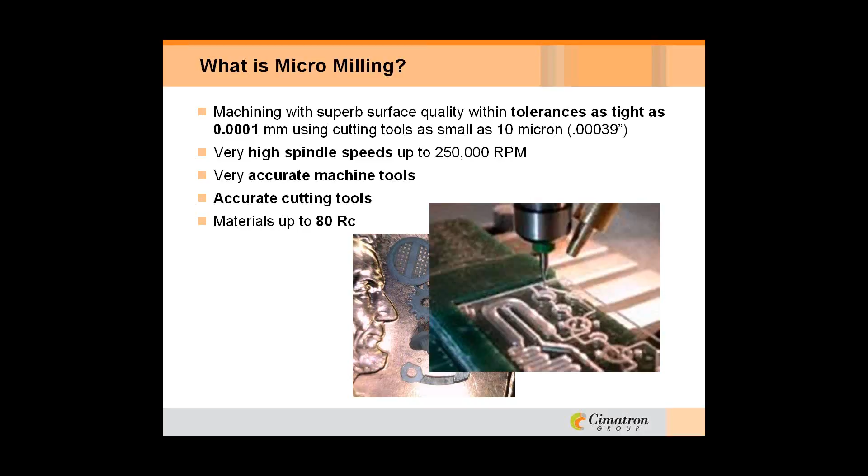Along with the micromilling, you have to have very accurate machine tools with repeatability and location and all that stuff. Again, the cutting tools have to be very accurate, and they're cutting materials as hard as 80 Rockwell. Quite a bit is going on in this industry.

These machines go from 2-axis through 5-axis. Again, spindle speeds 25,000 or 250,000 RPM and up. Positional accuracy is very, very tight, with acceleration of 2G force. Maximum feed rates—as we get into this further, you'll see why all of this is a requirement for these machines. Also the tool monitoring system, picking up the tool, monitoring the wear, the load, the growth on the spindle.

And then the machines also the controls—they have to be able to process a tremendous amount of data very quickly. They have to be able to look ahead and see what's coming when you're getting into corners and turns.

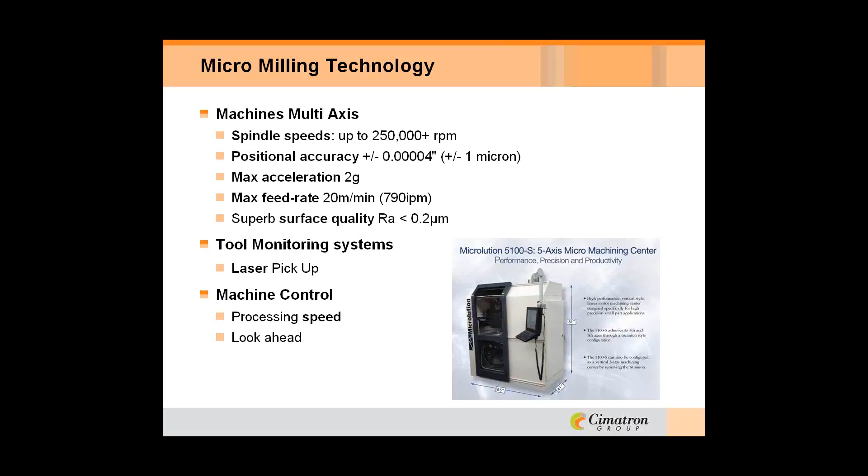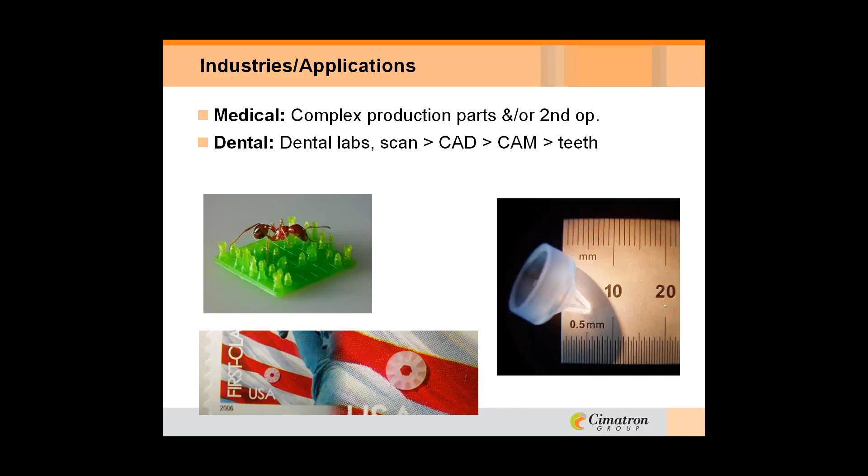Some of the industries using this application: medical, dental. If you notice there on the left, that ant—it's kind of hard to visualize, but that's actually a chessboard with all the pieces on it. So these are how small things are getting out there.

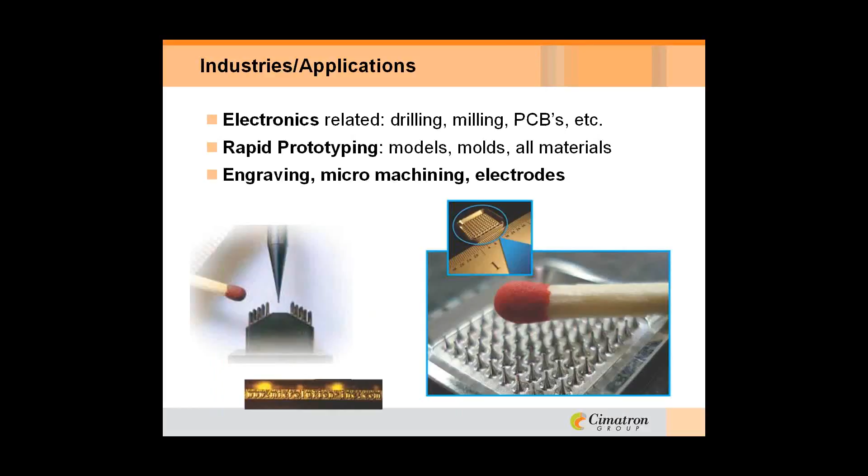Electronics, rapid prototype, engraving. We're even seeing machining of electrodes out of pure copper. Jewelry, and also in education, we see a lot of research and development being done on this new technology, the new machines, and cutting tough materials with the type of cutters out there.

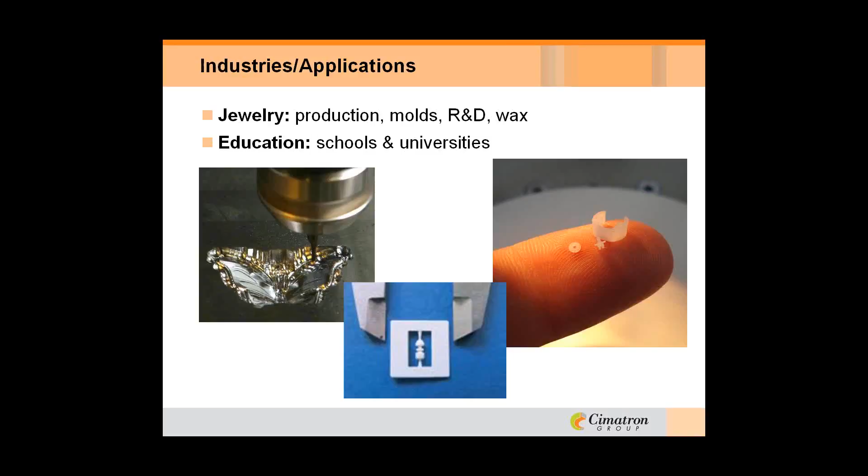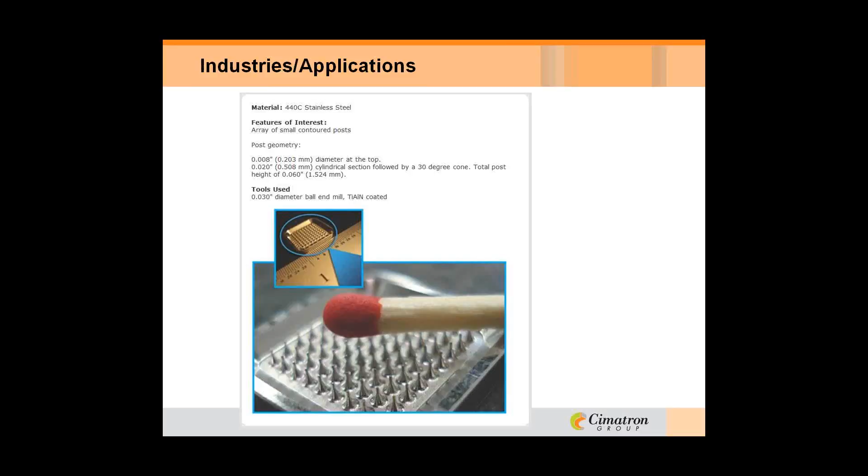Some of the applications—this one here was stainless steel. These posts were 8 thousandths in diameter, 60 thousandths high, and a 30 thousandths end mill was used. Again, real small stuff. This one here was brass.

Those cone shapes in the middle there have a wall thickness of 3 thousandths, and around the whole edge on the outside there are 8 thousandths diameter holes. So you can imagine how tough it would be to cut these with these tools, and how accurate you have to be.

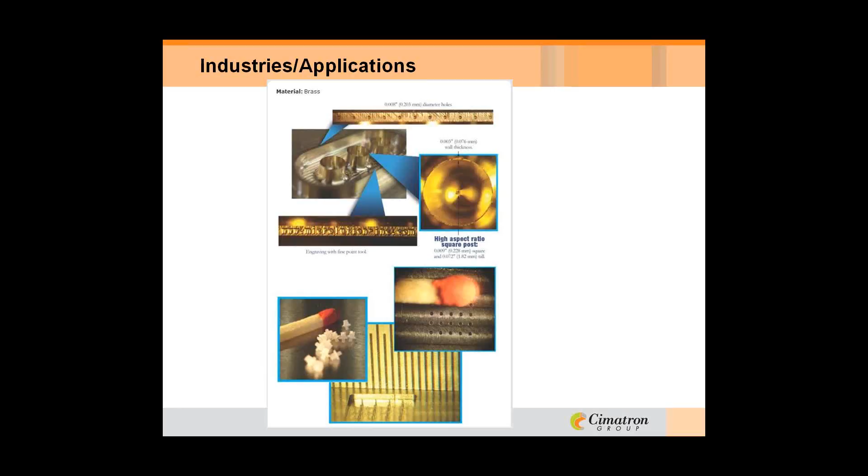Now, if we look at the micromilling challenges, the world is getting smaller. There's a tremendous increase in demand for manufacturing micro-scale components. And every day there's new challenges with new materials—they're coming up with new and different molds, coating.

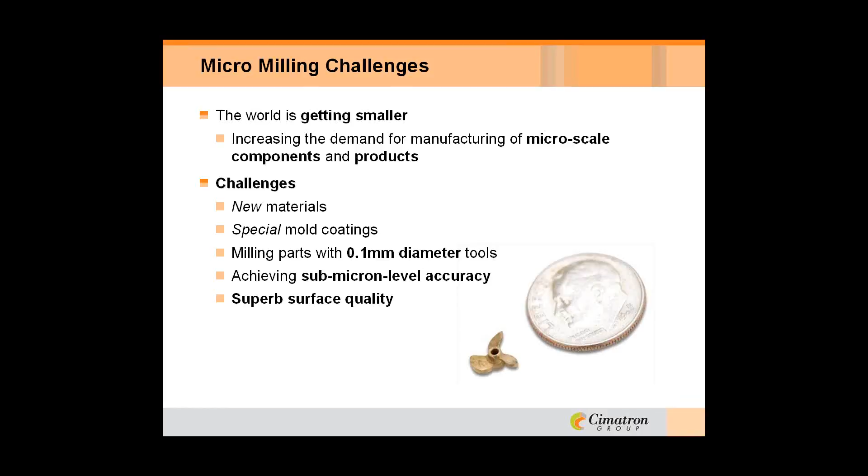Again, they're milling parts with 0.1 millimeter diameter tools. They have to achieve sub-micron level accuracy, and when these parts are that small, they have to come off completely done, so the surface quality has to be way up there. They're measuring these things with microscopes, and it's quite amazing.

Some of the opportunities you can see here: there's a small part that was a two-shot mold, and another one which was an insert mold for the electronics industry. A lot of people are looking into this as a niche market so they can have some competitive edge, because not everybody's able to produce tooling or produce parts this small.

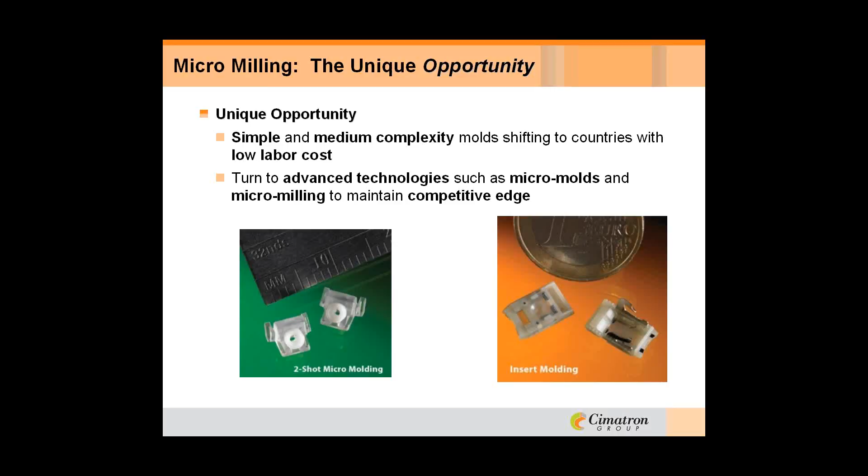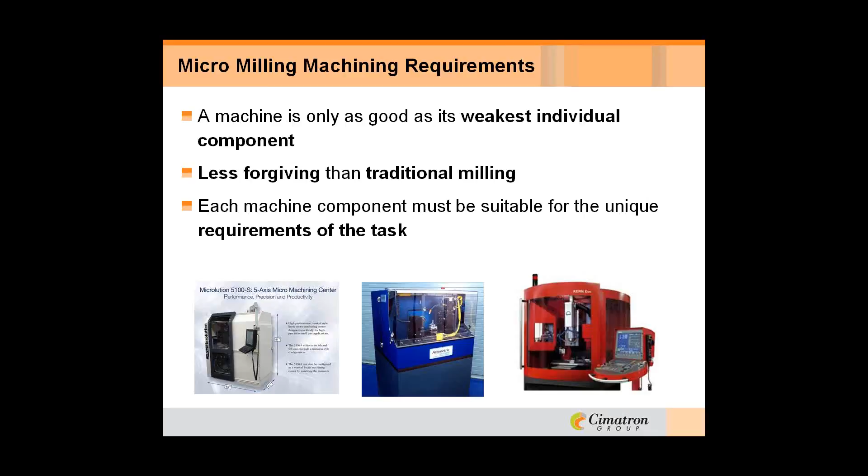Now, if we look at the micromilling machine requirements, the machine is only as good as its weakest individual component. It's definitely less forgiving than traditional milling, and each machine component must be suitable for the requirement of the task. If you're cutting real hard material, you're going to have to look at different tooling rather than using standard tooling for softer material. So there's a lot to consider.

If we look at some of the things you should consider if you're investigating micromilling: the bed and the architecture of the machine. Again, when you're holding microns and cutting with 2, 3 thousandths, 1 thousandth, 4/10 cutters, every bit of vibration is going to affect what's happening.

Also the temperature of the room and the parts, and definitely the spindle - what type of spindle, and what happens when you change tools, how accurate is it changing the tools. So there's all kinds of equipment to monitor all of this as you're running these machines.

The drive and motion technology - how accurate is it? These machines move so fast, they have to get to the point. Is there backlash? You definitely have to have high acceleration, and the guide system has got to be repeatable and consistent, and you can't have any wear on your guide system when you're trying to hold microns.

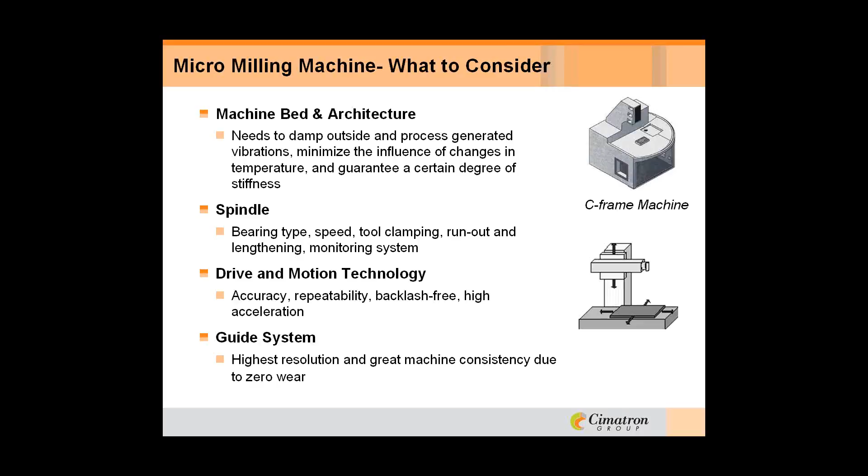Another thing to consider is how you're going to hold your parts, how you're going to clamp them. You've got to be able to quickly interchange parts. You have to be very accurate when you're putting in the second, third, fourth part.

And again, on the controls and monitoring system, tooling - when these spindles are in there for a long time and you're cutting, we did one test with a 6-thousandths ball cutter that cut for 12 hours. Well, is the length of that tool changing? What's the wear on the tool? What's the force? Is it running out? All of this has to be monitored while you're cutting.

And again, these controls have to be very fast and process a tremendous amount of data in a short period of time. And then, laser pickups - they're using laser pickups for picking up the part, locating the part, and monitoring the tools.

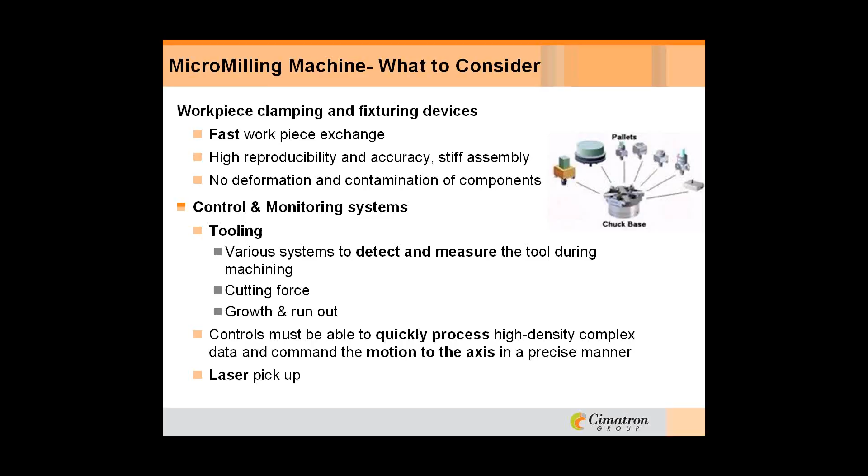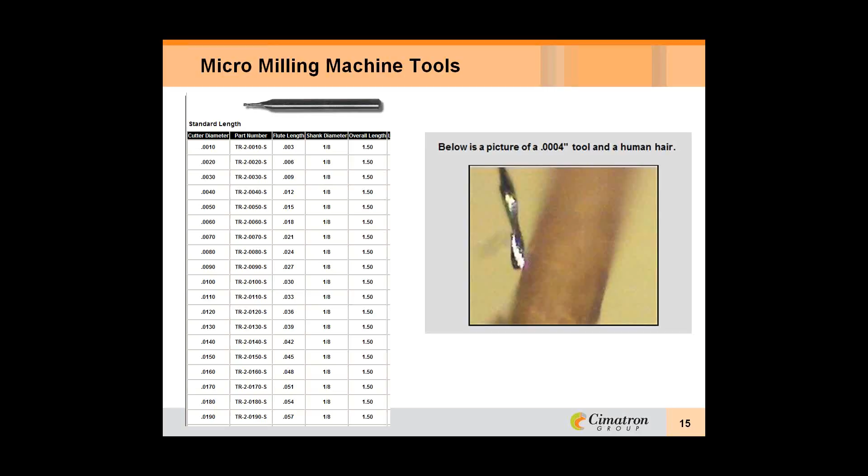And what we feel is a big requirement for micromilling is the CAD/CAM system. First of all, when you're bringing in data, you have to bring it in as accurate as possible. You can't have any little gaps - any little mismatch is definitely going to show up.

Also, the system must be able to handle tight tolerances and machining strategy. You have to have a tremendous amount of tool control so you can cut these parts the way you need to, based upon the material, based upon your cutter, and based upon the results you're looking for.

One of the other very important things is knowledge of stock. If you can imagine cutting with a 2-thousandths diameter cutter and removing a bunch of material, when you go back with that next tool path, you better know exactly where the stock is, because half a thousandth of stock could break that tool or not. So that's very important.

Also, these tools aren't real long. You're getting real close to the part, so you have to be able to track the tool, the holder, and where all of this can fit into the part.

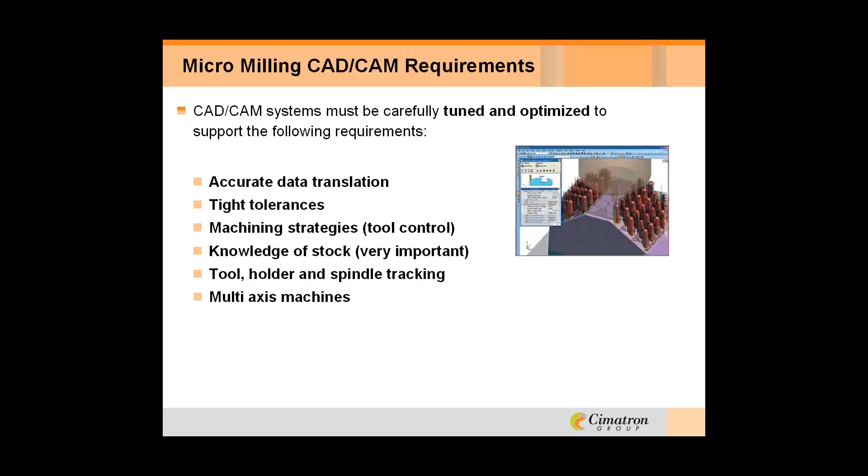Again, the data translation - gaps and mismatches are going to cause you problems. You're not going to end up with the result you want. The system should be able to read native format, bringing the data in exactly as it was designed.

It's real nice to have an integrated CAD system, so in the event that you have to do some modeling of a holder or a fixture, you can bring that right into the CAM system. The CAM system then can recognize that the workpiece is there, along with the stock, the holder, and your fixture.

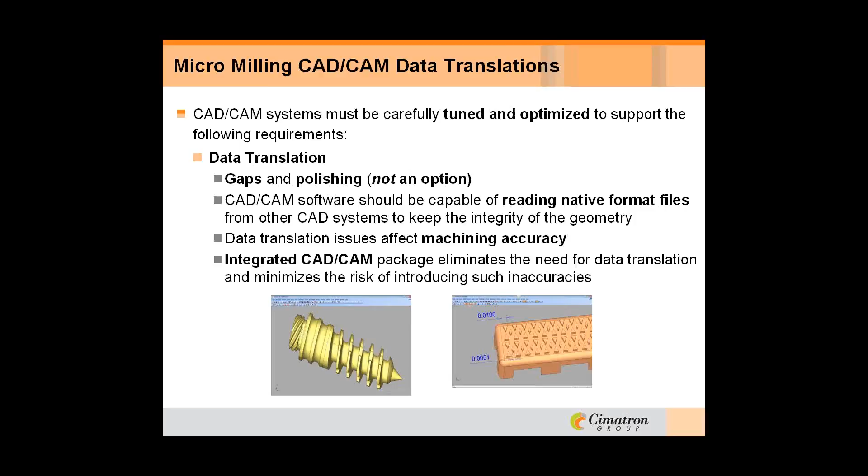The algorithms to produce the tool path, the smooth tool path, has to be there. These machines need a tremendous amount of point distribution throughout your tool path, so it has to support that as well. You definitely want to round and smooth all of your tool paths, whether approaching, getting into a corner, or just changing directions. You must have rounding of the corners, and smooth and accurate tool paths.

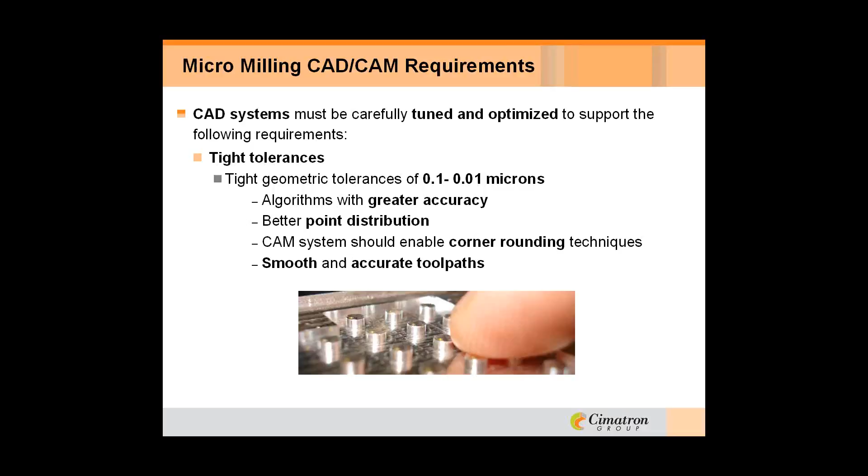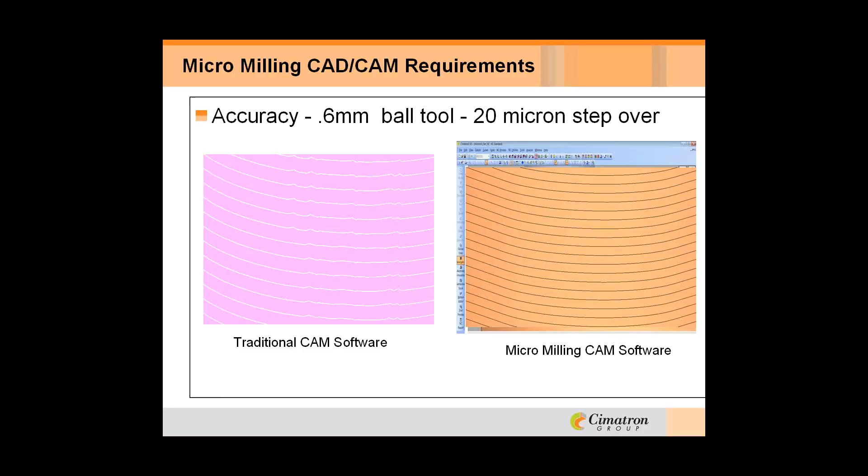This picture here is basically a traditional CAM software where we created a tool path with the same tolerances, same side step. It was a 0.6 millimeter ball with a 20 micron step over. You can see here the spikes on the left versus a nice smooth tool path. Those spikes are measuring 0.4 micron. Doesn't sound like very much, but when you look at this part under a microscope, you're going to see all of that.

Some of the machining strategies you should consider: you definitely have to have intelligent tool paths. Constant chip load is vital to using the tool the most efficient way. Again, the knowledge of the stock - where do I go, how much do I cut - and feed optimization. What happens when you get into that extra couple of tenths of material? Do you want to continue moving at the same feed, or do you want to slow down?

Tool control. You have to be able to cut these parts at 80 Rockwell. You can't just cut it like you normally cut anything else. You have to attack it slowly, and you have to have the most efficient tool path.

The tool motions - high-speed machining options where you have the trochoidal or rounding corners, rounding rapids. All of this is vital when you're cutting with these small tools. Clean between passes, clean between layers. Knowing all the information about the stock and where to go is important, but also the motion to get there.

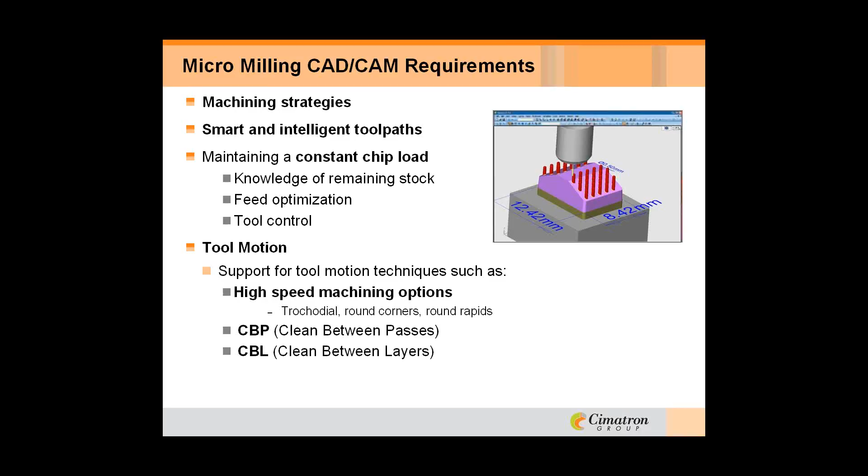Back to the knowledge of the remaining stock. When you throw one tool at it and then go to another tool, you don't have to create boundaries or remember. What some people end up doing is cutting the whole job with the smallest tool and cutting it very slow because they don't want to figure out where they have to go or forget an area.

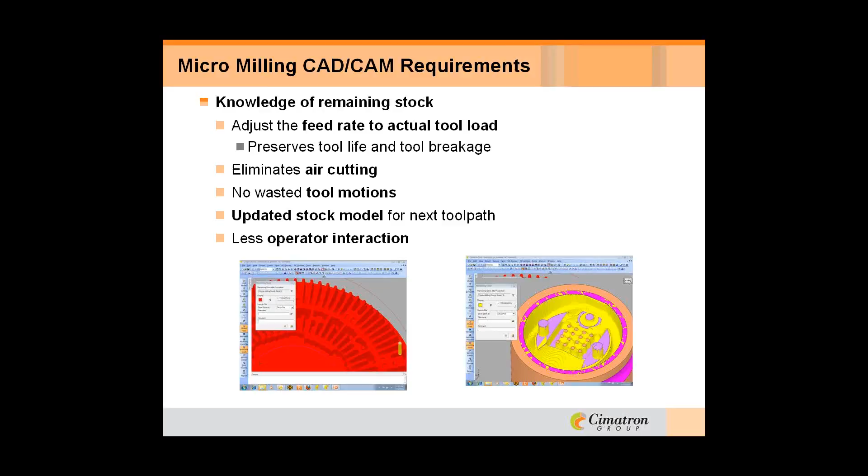Again, the less operator interaction when the system knows what's been cut and what hasn't. Tool holder and spindle tracking - you want to use the most efficient tool that you can.

So the CAD and CAM system has to be able to say, I'm going to take the short tool, cut everything I can, but when I grab the long tool, I'm only going where the short tool couldn't go. So the short tool can get 80%, maybe even 90% of the job. The long tool can get the areas that couldn't be reached. It's much more efficient on machining time, and you're not relying on the programmer to remember to go back and get every little area.

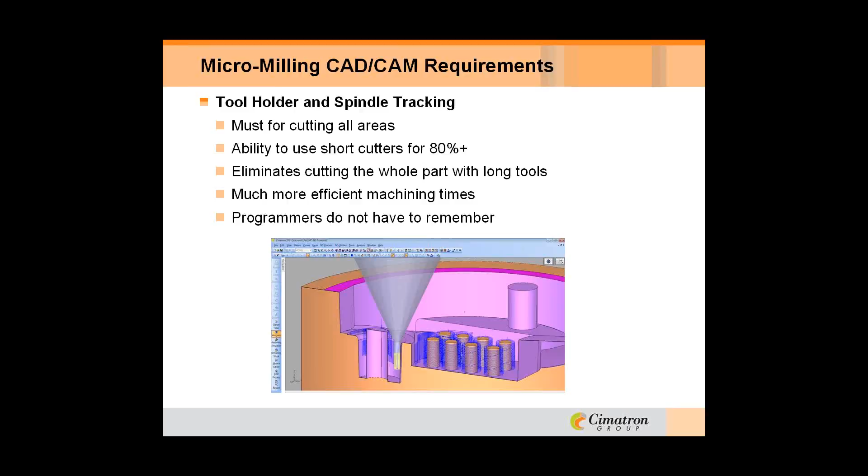Also with multi-axis, with 5-axis, again these real small tools are attacking these parts at different angles, different directions. A lot of times you have to get better surface quality. Once you start tipping your tool and moving around the part, you better know where that stock is. So if you cut it from one side and go to the other side, the software must know that's all gone - I don't have to waste time cutting air.

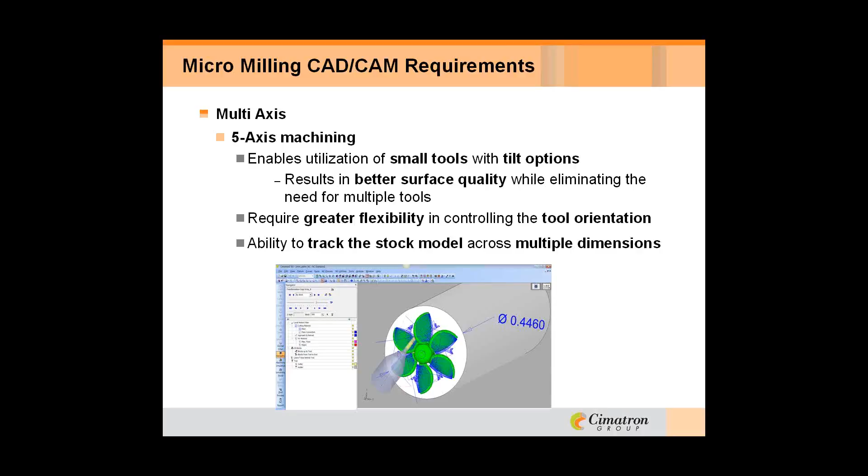Now, if we take a few minutes and look at some examples and some tool path strategies, I'll turn it over to John.

Hello, everybody. Can you see my screen, Ralph? Yes, now I can. Okay, great.

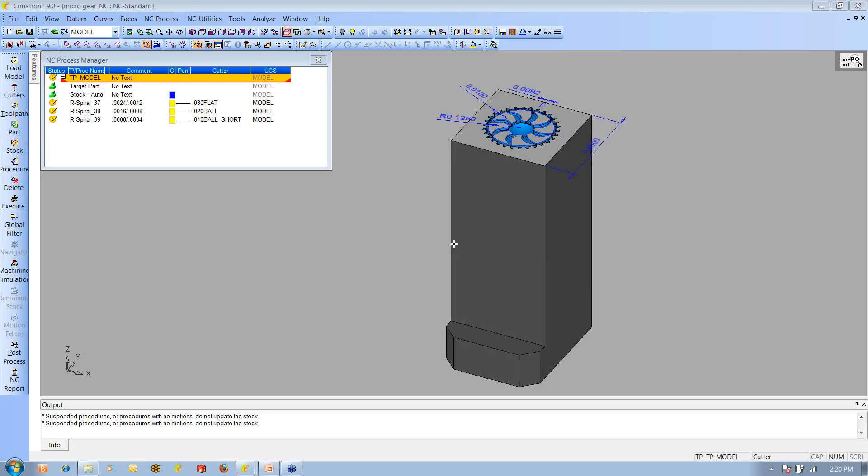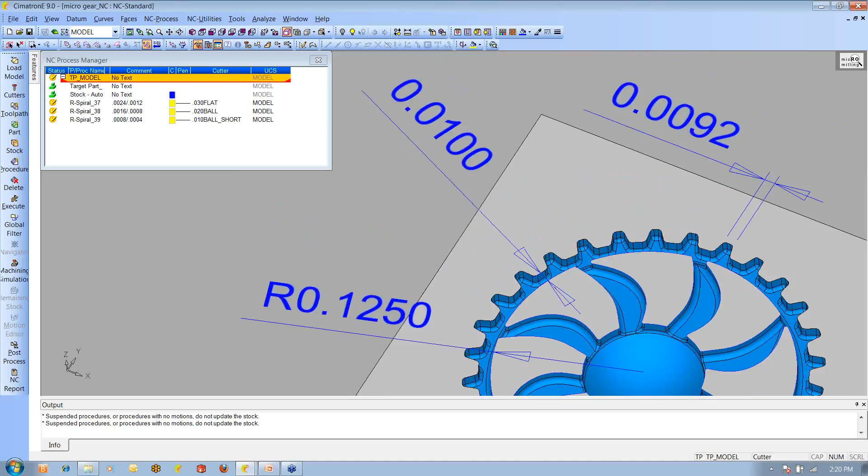Okay, so I've got just a couple of examples today. The first one I have here, I've got some dimensions on the screen so you can see how big the part is - not terribly big. If I zoom in on this area, you can see that along the outer perimeter of the part, I'm going to have a cutter that's less than 10 thousandths to get inside there. But obviously, there are areas where bigger tools can go, so we're going to whittle it away with a series of cutters. I've got just 3 in this example that we're going to calculate live. So let me go ahead and launch this first one.

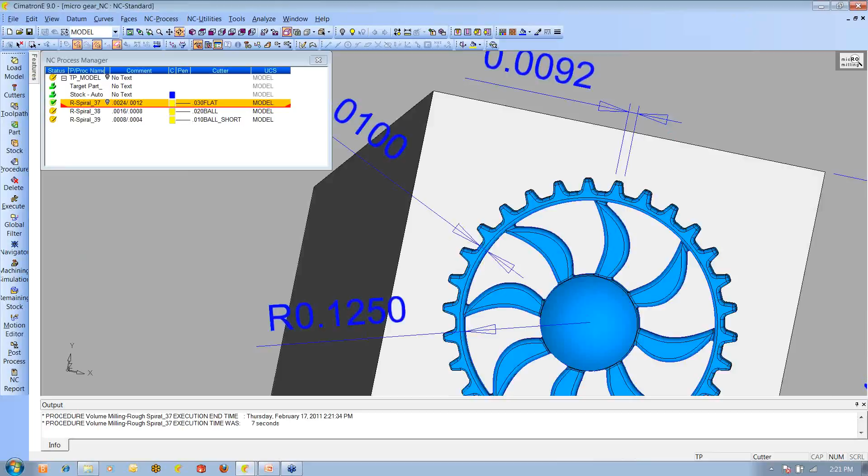Okay, so the first tool path is 30 thousandths flat, and it goes in and roughs out this center area. But obviously the tool is too big to get into these other areas, and we'll point that out a little bit better in a second.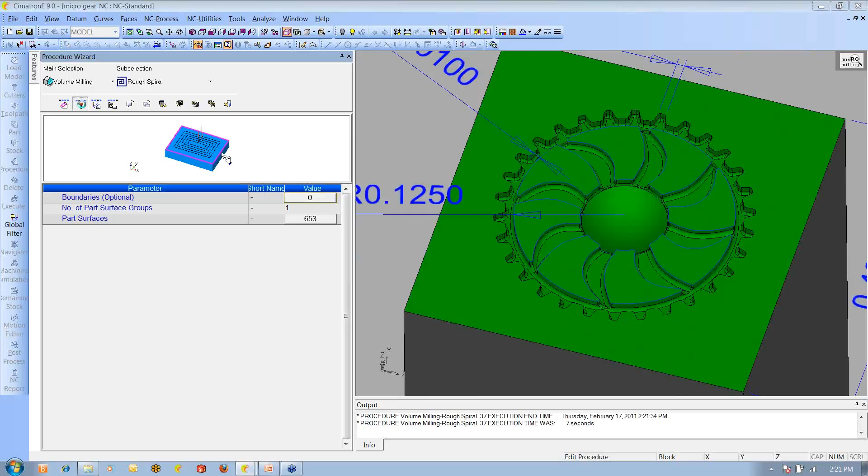Let me open up the second one. I'm going to go to my tool library, and this is a 20 thousandths ball cutter. I can get a feel for the size of that tool if I position it on the part, just to understand it - is this tool really going to be able to fit into these areas? But this is only one of a couple ways that we can determine whether or not this tool is the right size for the task.

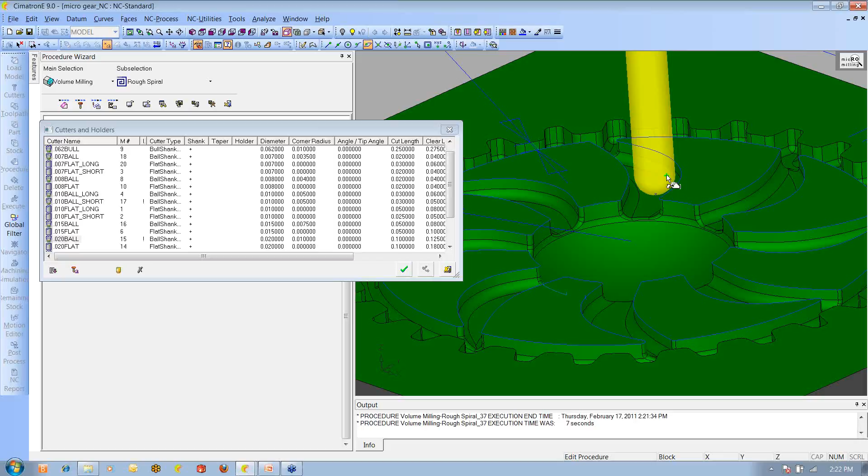Before I show you that, let me point out one thing. Being that we're doing micromilling, you'll see that my decimal places here are 6 places. So when it comes to the amount of material I want to leave or the step down, we can get all the way down into 6 decimal places for those parameters. But what I want to show here is the preview.

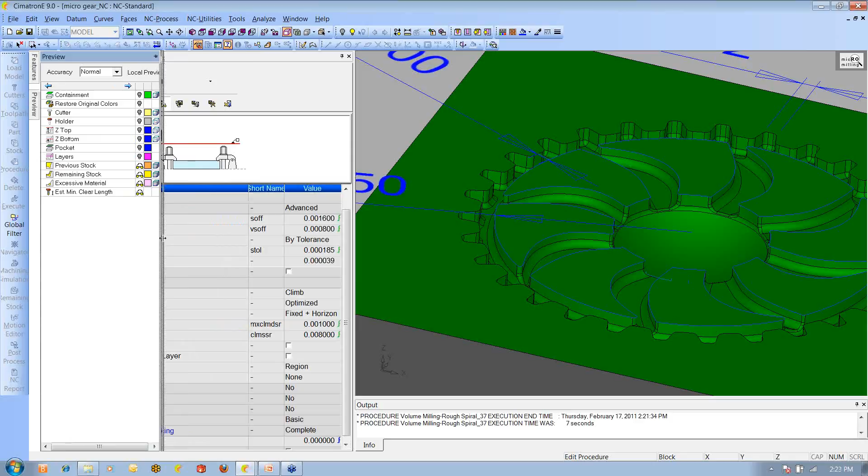Now, this particular procedure has not been calculated yet, and even so, we can look at some things. Let me just open this window up a bit more. If I look at the previous stock, this shows me what the last tool left for this procedure to cut. And I can also look at the remaining stock. This would be a preview of what this is going to look like if I were to calculate this program with the settings I've chosen.

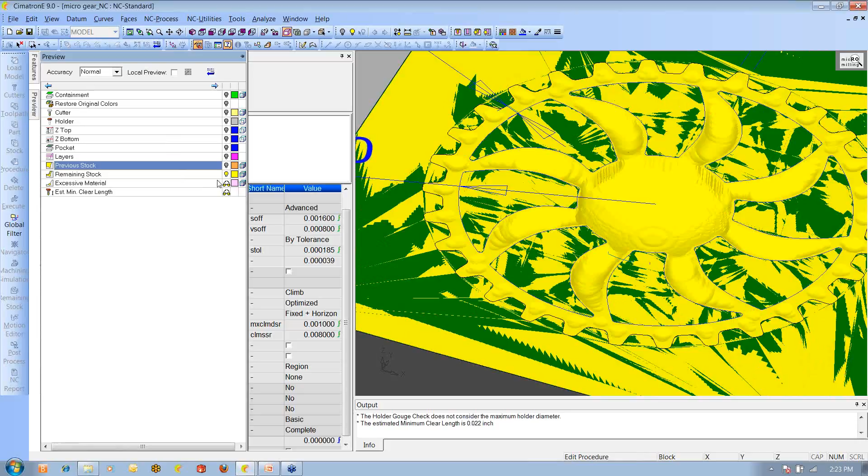So you can see that it's showing us it's getting into some of these areas. And then lastly, we can also see the excessive material, and this points out where that tool is going to encounter some heavy areas. So let's go ahead and calculate this one.

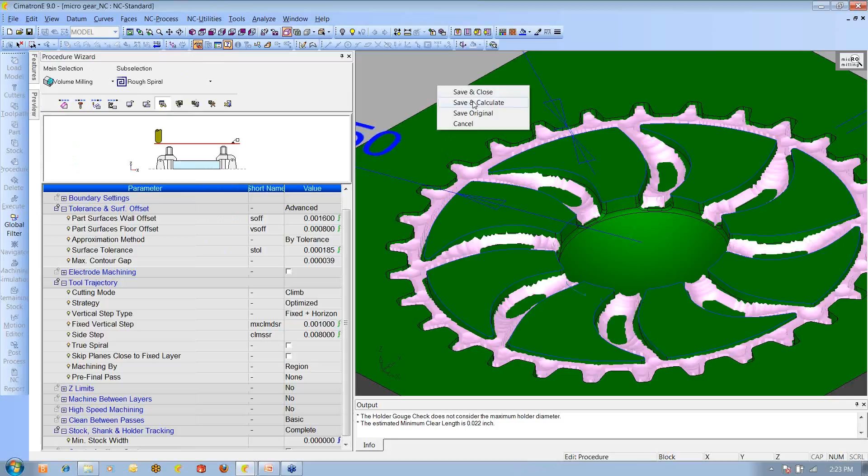You'll notice that, like Ralph was saying, I haven't had to draw any boundaries or tell the tool where to go and where not to go. The system is taking care to track the stock.

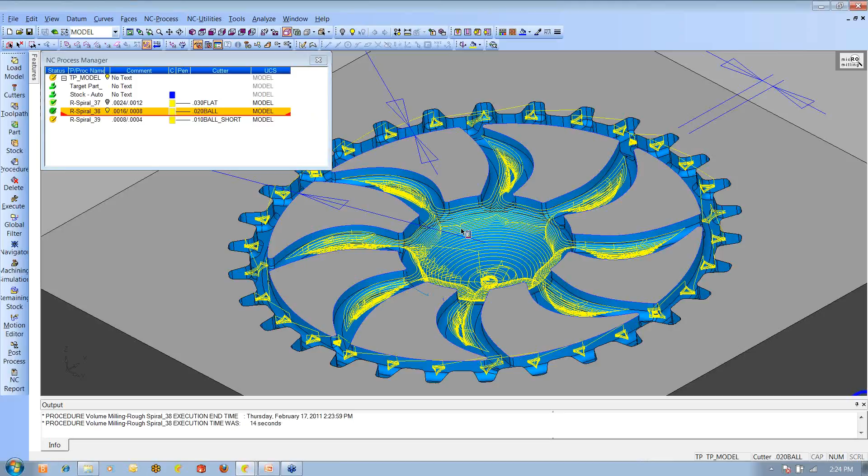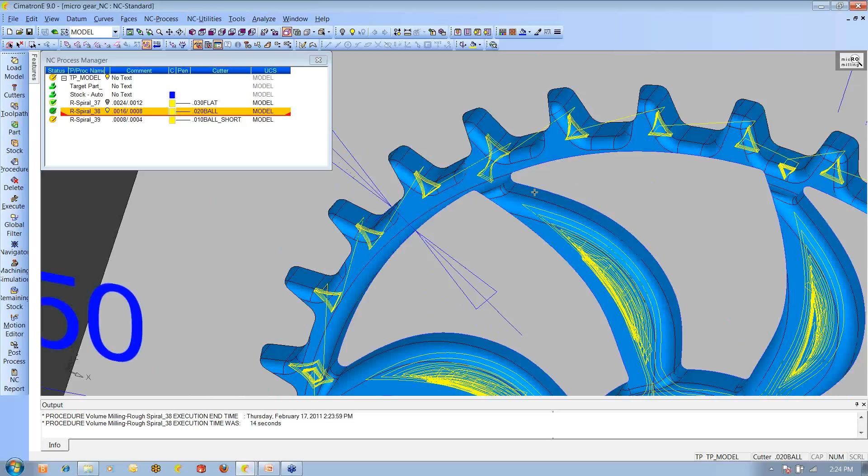So you'll see that, for example, in the center area where the 30 thousandths flat was able to go, obviously I don't have more roughing motions there. But over here, obviously the 30 thousandths flat didn't go there, so I am getting these roughing motions. But still, the tool is too big to really get into the ends of the vanes. It's going down a bit out here, but we're still a long ways from finishing this outer perimeter in the teeth of the gear.

And let's execute this one. And while we're waiting for that, I'll elaborate a bit more on the tool library.

Like Ralph was saying, for the tool library, we can have specific libraries for various materials so that in micromilling there's so much testing goes on to have the appropriate down step, side step, RPM, and feed rate. The tool suppliers actually do a great job of supplying the recommendations. And once you're satisfied that those parameters work, you're able to store all of that data in the tool library, and it's accessible at any time by right-clicking in the software and saying, bring this information into the procedure. And of course, that's in addition to the standard templates that we normally would use.

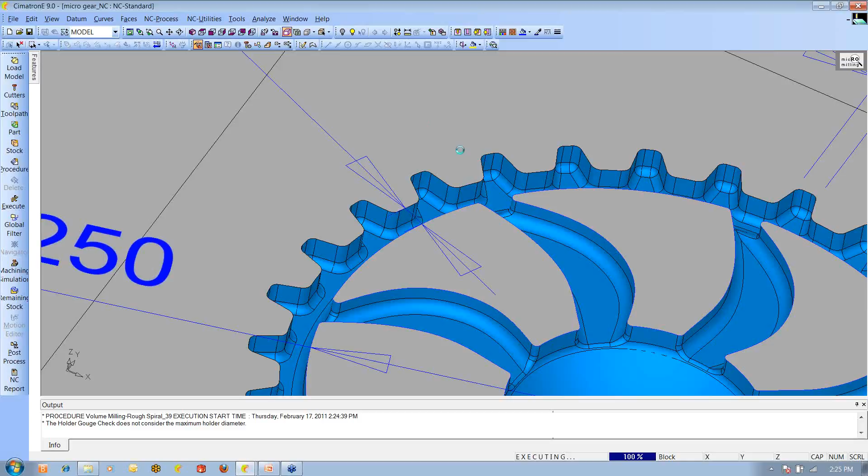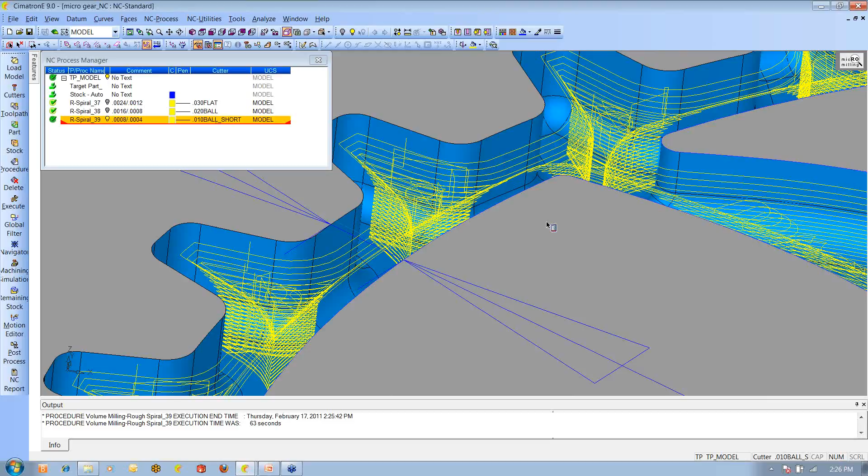Okay, so here's the third tool path, and the same thing holds true. You can see that in the bigger area of this vane, it knows that material is gone. So the roughing is just staying in the areas that have not been roughed out yet and where this tool can go. But even here, you'll see that I'm down to a 10 thousandths ball cutter, and still there are areas that haven't been machined out.

So rather than keep going through all this, I'm going to open up another file where I already have that done.

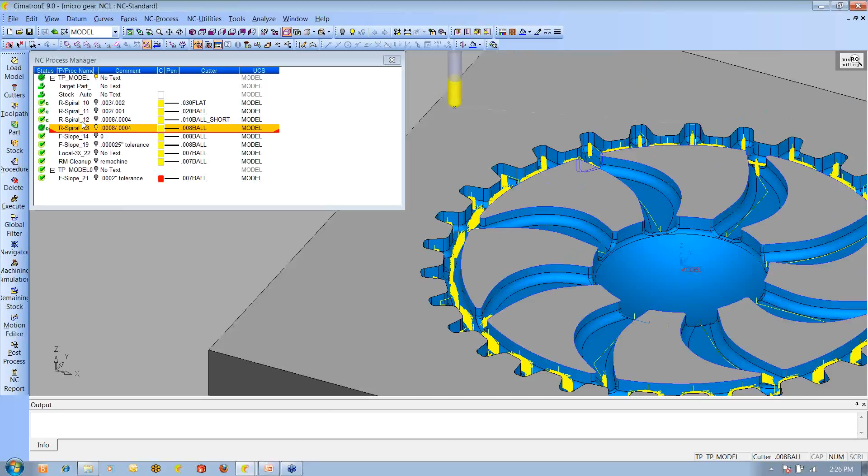This would be the next procedure where we're now going down to an 8 thousandths ball cutter, still using a roughing strategy. And you can see that this one also, it knows what areas have been done and what areas haven't. So it's taking the material out from the ends of these vanes and in between the short area of the perimeter and at the very end of the teeth.

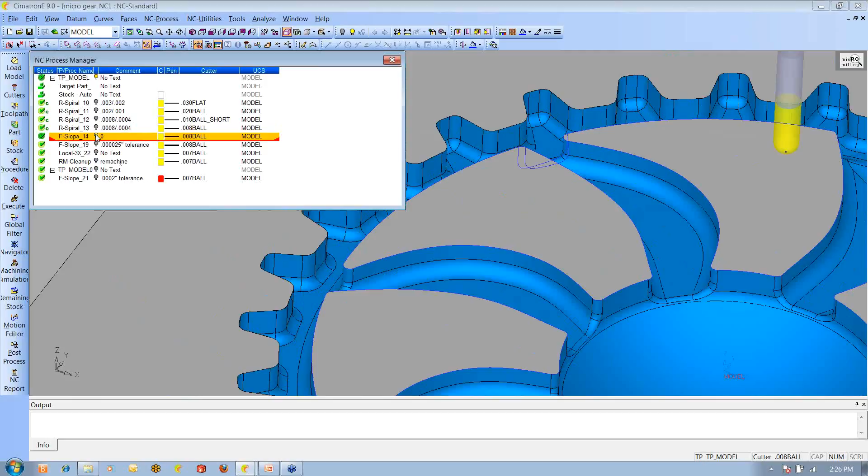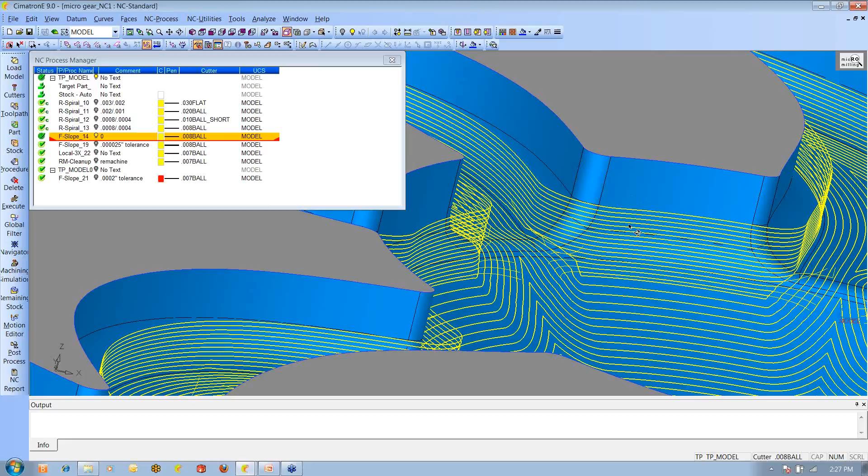So now we've successfully roughed this all out down to an 8 thousandths ball cutter. And the next procedure is the 8 thousandths ball cutter using surface milling by limit angle strategy. What that one does is it looks at this differently based on horizontal and vertical areas. So you can see that across here in the more vertical areas, I have a bi-layer path, like a Z-layer strategy, and then in the more horizontal areas, I get a spiral collapse.

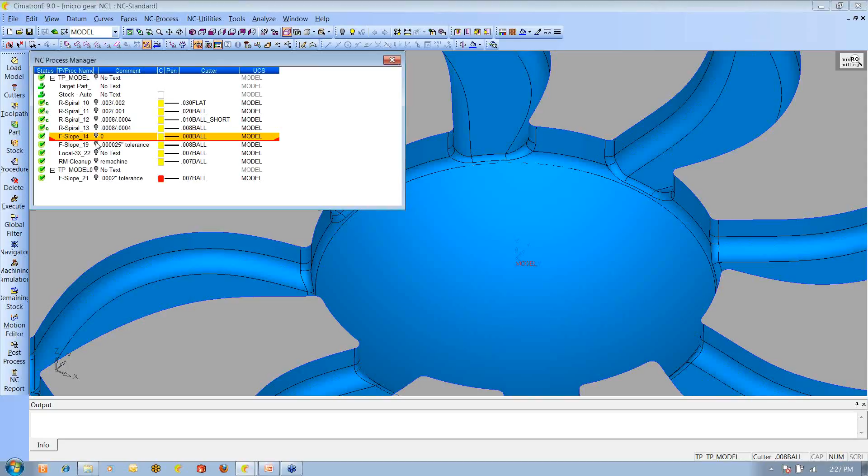And it is a very nice path. Now, this one technically did take it to zero, but just to reiterate some of the things Ralph was saying about tool control, I made a couple more examples here.

This one is going to be a spiraling tool path. You can see that my tolerance is set to 25 millionths, and it's a true spiral, so there's no connections between lanes.

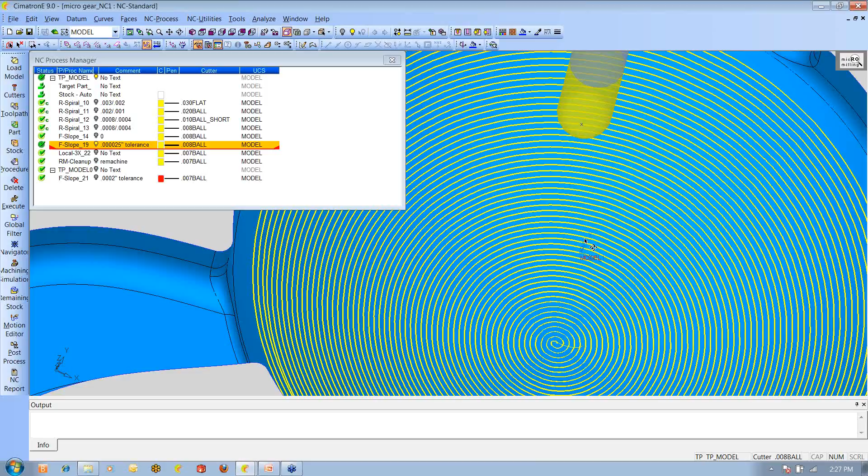I also made an example of a standard tool path with the same strategy. The only difference between these two is that this one is calculated with a 2/10 tolerance, which in most cases would be a pretty tight tolerance, but compared to 25 millionths, it's not so much.

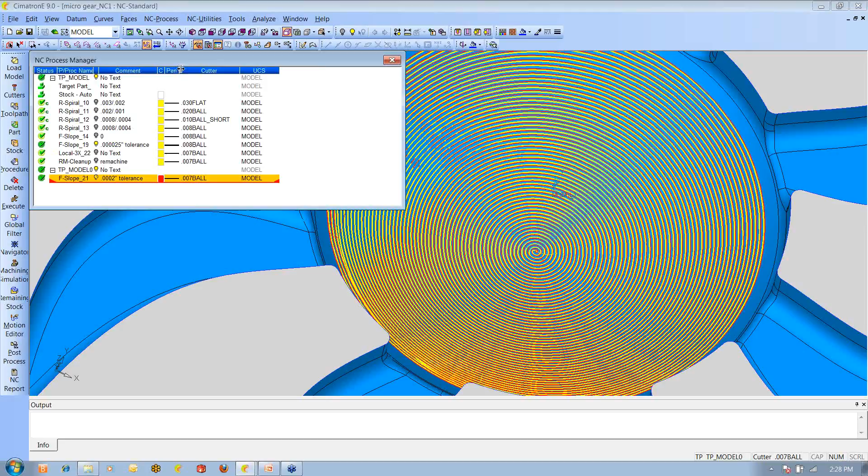So now I turn on the 2/10 tolerance. We'll go to a top view and zoom in so you can get a real feel for the difference in the tool paths. You can see that the red chord length is much longer than the yellow micromilling path. That's the difference between micromilling and standard milling at a 2/10 tolerance.

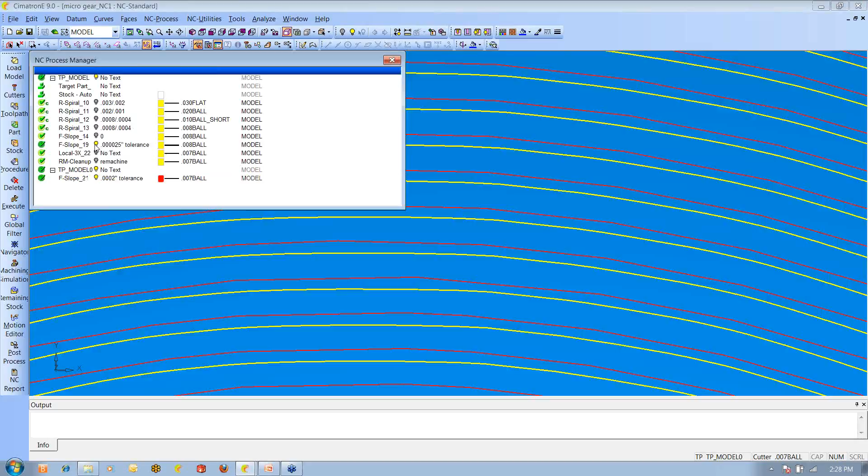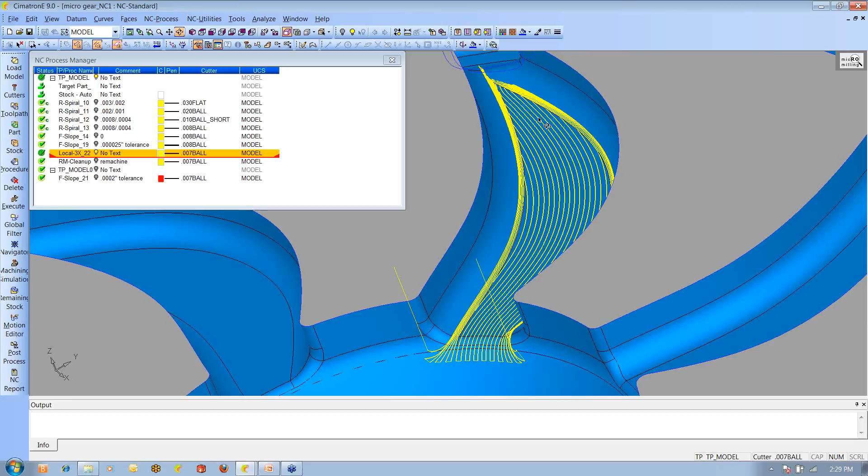I have one more example, well, two more actually. This one is a morph between two curves. What I'm doing is machining this vane and giving it a guide curve on the left and a guide curve on the right, and doing a morph between the two to give a nice finish in each of those vanes.

And then lastly, I have the remachine cleanup. The remachine cleanup also has no use for boundaries. It's able to go in and accurately see what areas need to be remachined based on knowledge of previous cutter as well as previous stock.

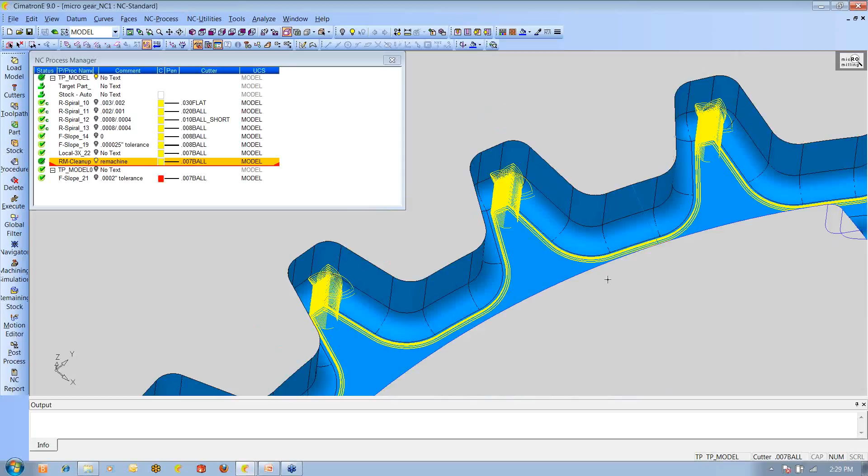I think the one thing to note on this too is if you show that tool path again, John. Yeah, the system is intelligent enough to know what's vertical and what is horizontal, so it's going to do the verticals in a Z-level manner, and then it's going to flow along the floor all the way along because that's more of a horizontal cut.

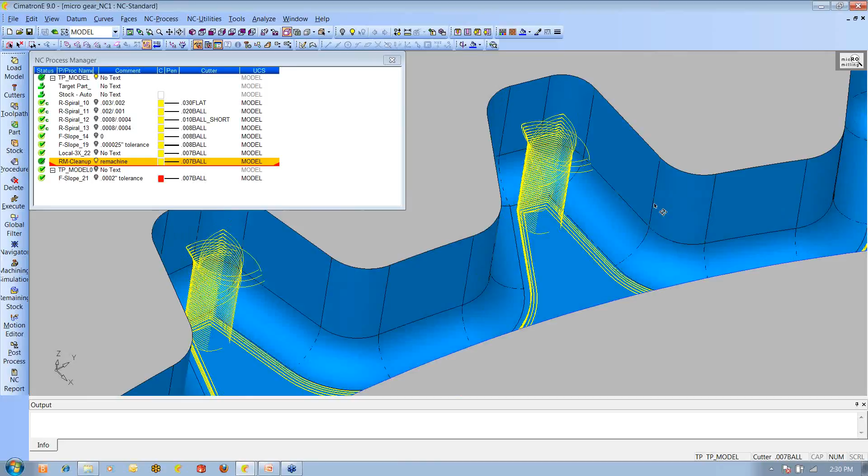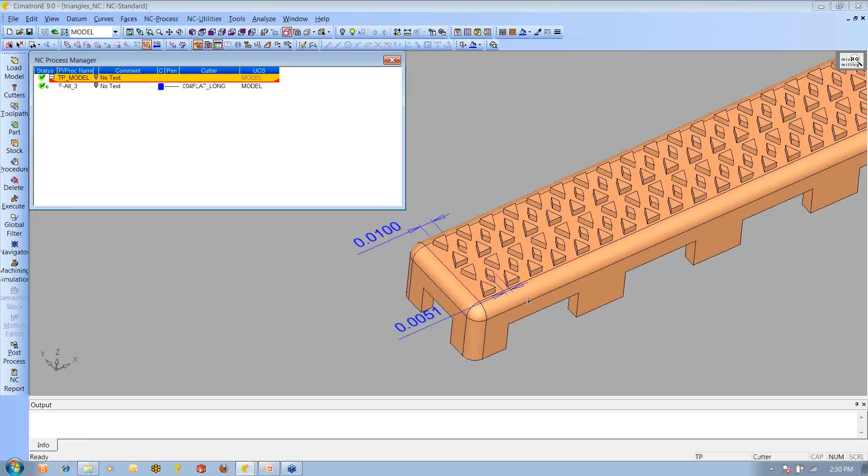Okay, I've just got one more example here, and this one is one of my personal favorites. It's our ability to maintain sharp edges, and I think it's pretty cool.

Basically, in an example like this, we've got these little triangles that we need to machine, and if you can imagine a small cutter running around these, there's an excellent chance you could be rounding off the corners. If this needed to stay nice and sharp, the appropriate way to program this would of course be two-dimensional.

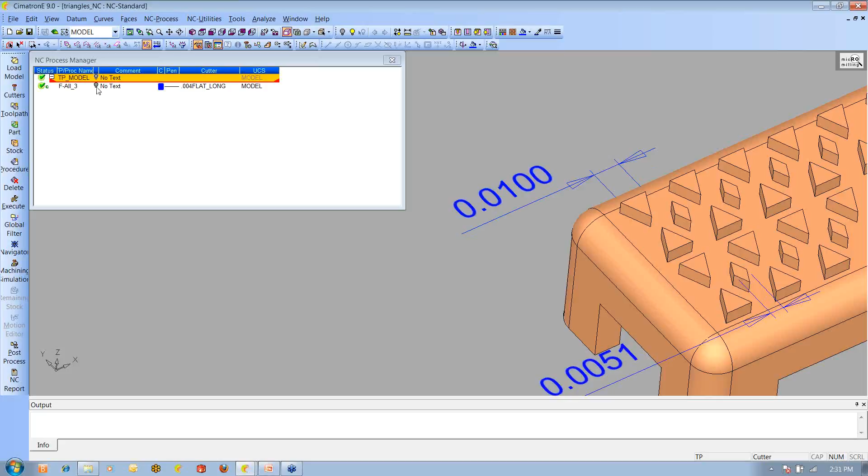You could have a lead in, cut across that length, and a lead out, and then again a lead in, cut across that length, and a lead out. I think everyone would agree that's the appropriate strategy for this type of situation. And we can do it in a 3D environment.

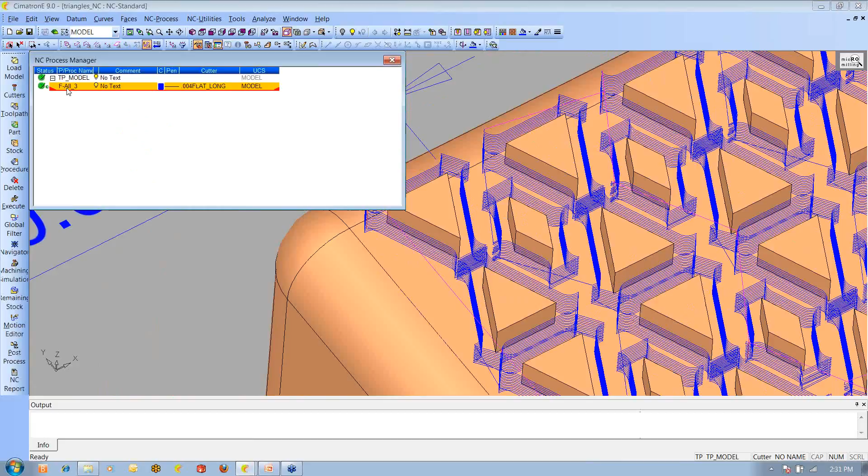Basically what we do is define the sharp edges. I'll quickly go into this one and show you that I've selected all of these vertical edges as being sharp. So when I calculate this, let me go to the navigator and I'll play it for a second so you can see.

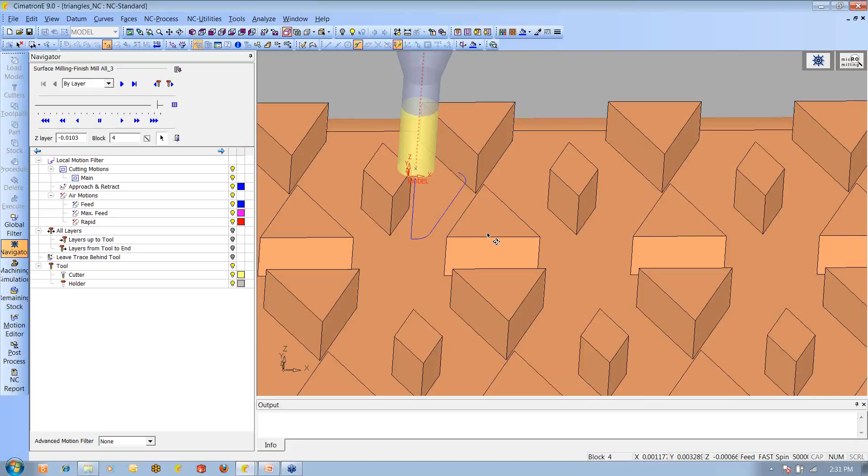As the tool comes down, it's going to do just like we would in a 2D environment. It's going to arc in, cut that length, arc off, and then do the same thing for each subsequent edge.

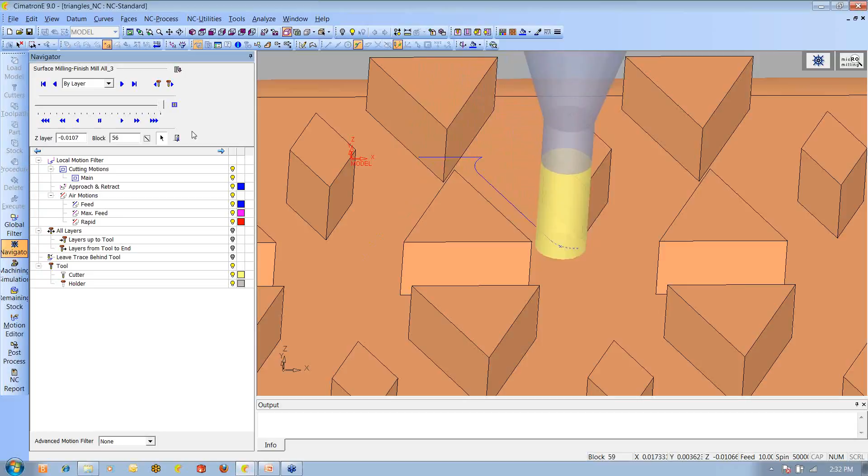We have this ability not only with vertical sharp edges but also horizontal sharp edges, which is handled a bit differently. But any sharp edge we define in the software, the system is careful not to round it off. Not that the software would round it off, but sometimes various combinations of things can work against you to round corners off.

Okay, I'll turn it back over to Ralph at this time.

Thanks, John. Again, we're showing some of the techniques for how to handle these micro milling machines and how to cut the parts the most efficient way, attacking them the way they have to be attacked to get the results that you want.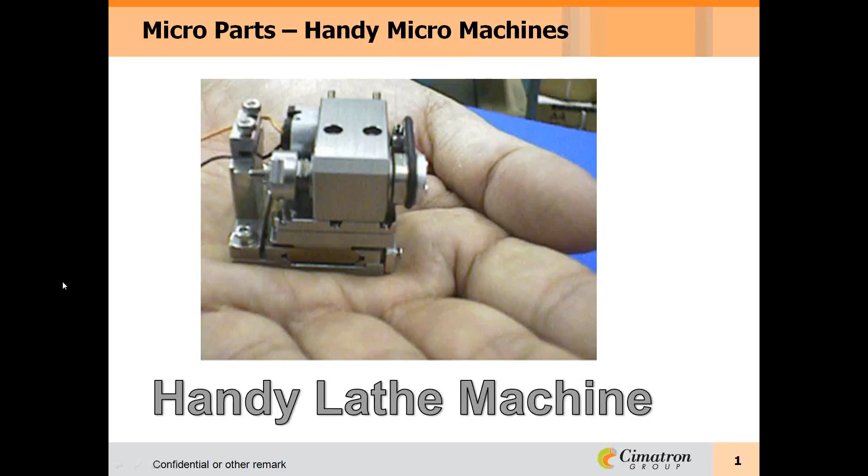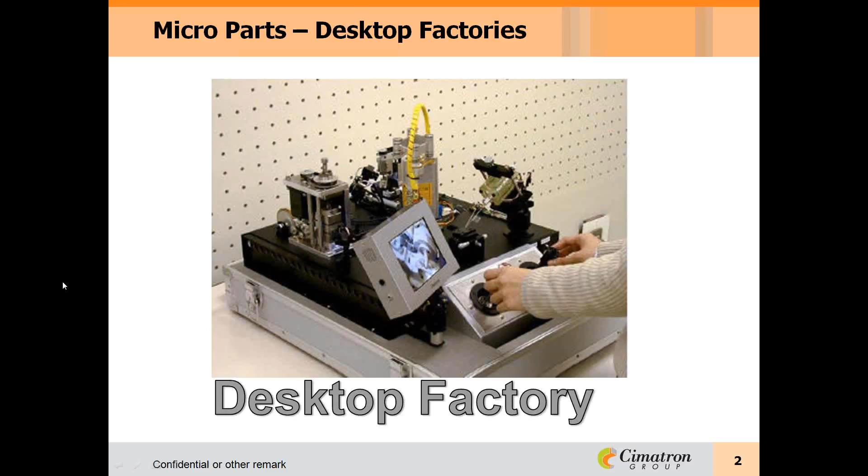So this whole market is definitely growing, and there's a tremendous amount of opportunity in this market, and quite a bit of investigation has to go into what you're looking for and what you want to resolve.